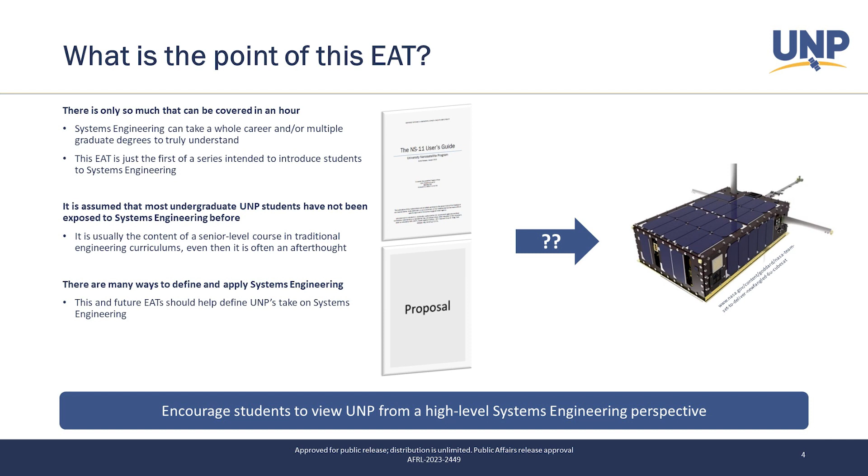There's lots of different takes on what systems engineering is, or what a systems engineer does. So I'll introduce you to a variety of those, but then it's up to you to determine exactly how it will fit into your team from the perspective of your mission and within the constraints of your university. I would say at the core of systems engineering, one of the big things is how do you go from a concept to something real? You have a proposal, you have the user's guide—now it's time to build a satellite.

Like I said on the last slide, one of those themes is realizing a successful system and getting there from an idea or concept, and how you turn that into a real system. Another theme is meeting constraints - meeting performance, cost, and schedule goals, while also meeting the needs of the customer. And the final trend is the multidisciplinary nature of it.

There's certainly a need for subject matter experts to dive deep into each individual topic, but the job of a systems engineer is to be more of a jack of all trades and to understand where you can give and take across those different areas of expertise. So it certainly is applied across pretty much all industry building products and takes into account the full life cycle of a product.

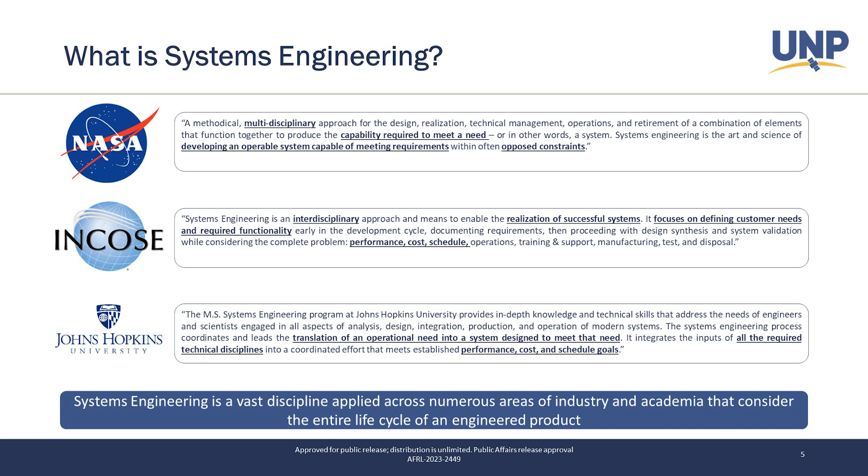It's informally been practiced forever. There are certainly large, complicated projects throughout all of ancient history, but it is more formalized now than it likely was then. Not only do we have all these parts, we have interactions, we have other things to consider. The systems engineer has to consider all of these things: electrical, mechanical, thermal, software - lots of different interfaces across lots of different systems. It's not just being a subject matter expert in one thing.

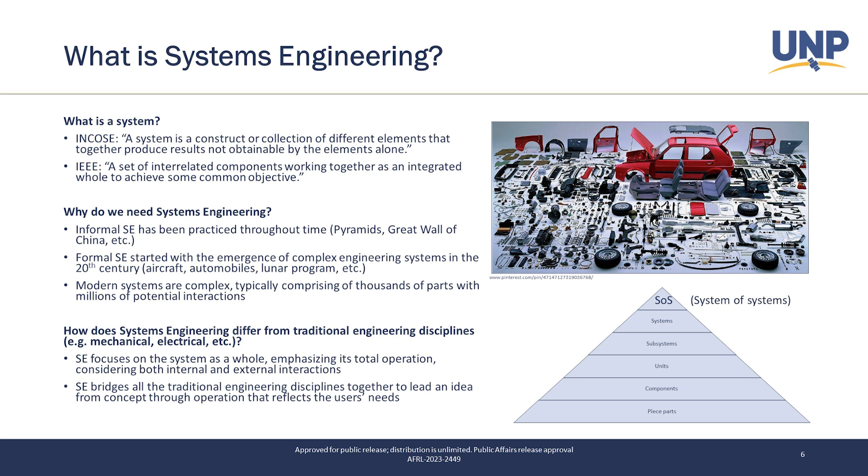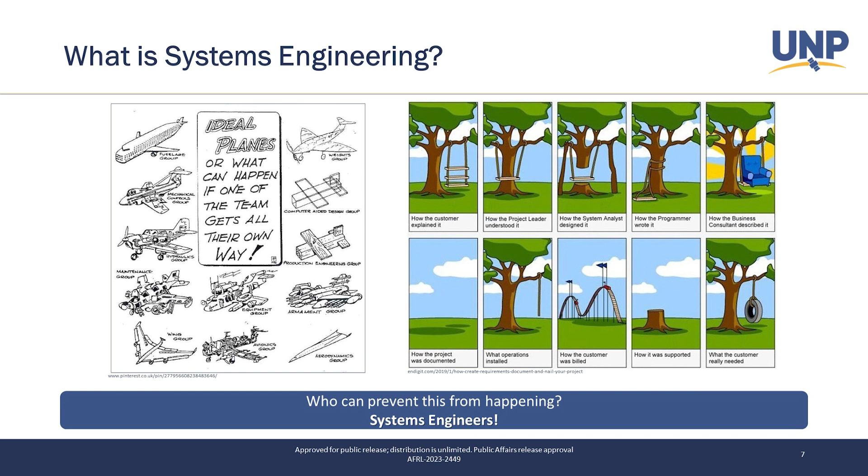There's certainly a human aspect, and that's one of the first things we'll call out here - to be an effective systems engineer, you need to understand how people work to some extent, and that people matter when you're trying to design a system. Whether it's the user interface side of people trying to use the device you created, or the personnel management side of making sure not every team creates just their ideal piece without considering what other teams need to do. The systems engineering role also frequently sits at the higher level and looks across the systems and decides where to give and take. Throughout the life cycle of a project, more information will be gathered as you develop it, but there are lots of critical decisions that have to be made early on when not all of the information exists yet.

And so that's certainly one of the key roles of a systems engineer, is understanding enough of each system to make an educated decision in the absence of complete information.

Linear systems, in terms of the system development process, are not truly linear. Ideally everything would follow the waterfall development method—do this, then this, then that. But in reality that's never the case, and you have to account for that up front. When you start designing a system, it typically won't turn out exactly how you expected, so there's going to be some iteration to adapt. Maybe your initial goals have to change, or maybe you have to redesign to meet those goals if they're not very flexible. Overall, this is going to be a cyclical process.

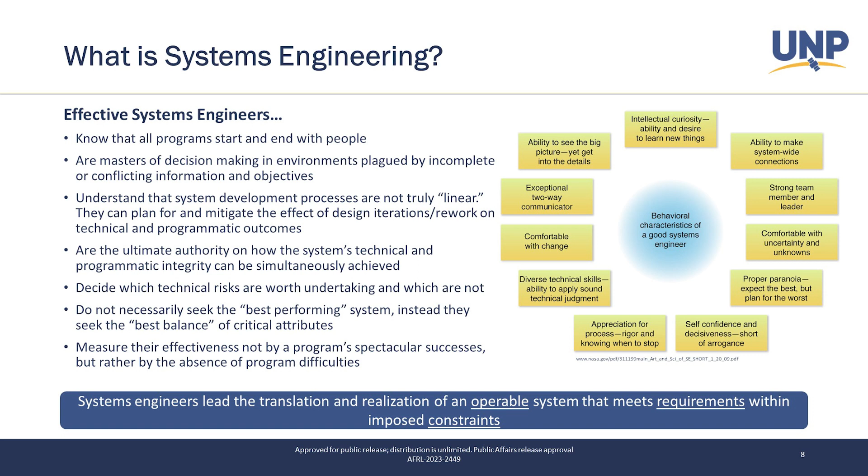And of course, it could move into ongoing maintenance and things like that. But certainly a good way to start thinking about this, and we'll visit a lot of the nuances of it in later slides.

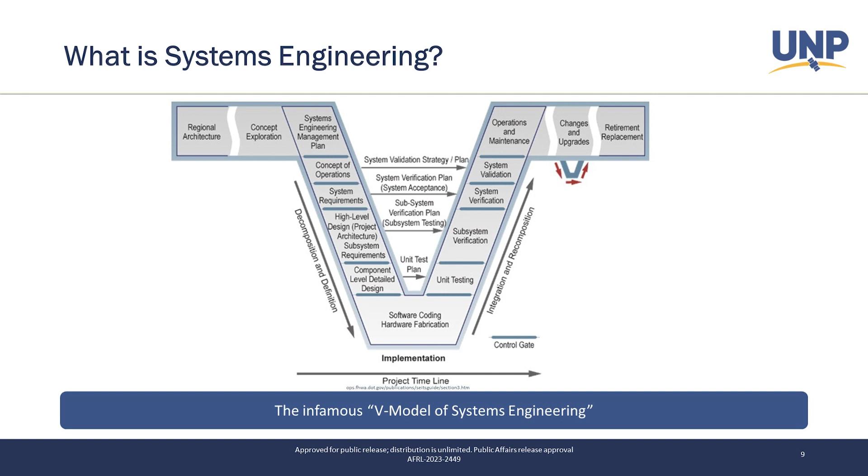One of the things we like to do as engineers in all of our courses—one of the reasons we probably got into engineering—is because we like turning bolts, writing code, and blowing up circuits we designed poorly, or something like that. We like digging into the nitty-gritty and doing the detailed design. But the problem is if we go there too soon, then the code we wrote, the CAD we designed, whatever, likely won't be correct for the overall integrated system. We have to understand the give and take of the fully integrated system before we can actually design our part to meet that.

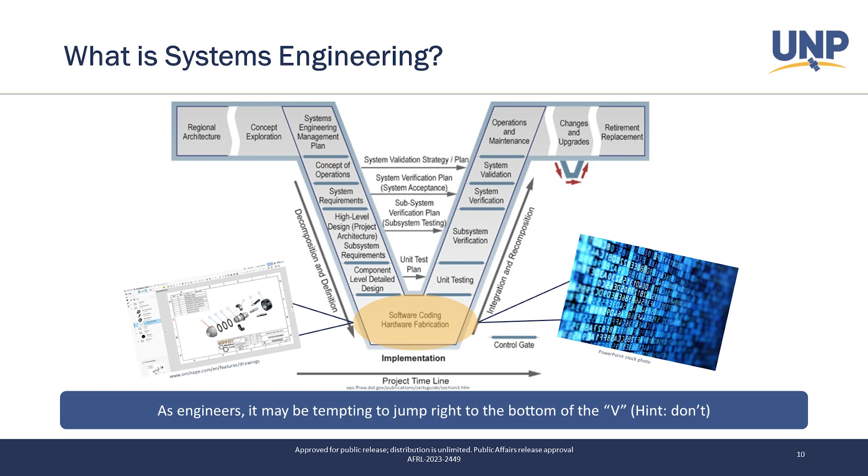So doing all this work on the left side, well, it may seem annoying at first, is actually very, very critical to realizing a fully functional system. One way to think about it is that the true design is actually occurring on that left side, before you ever even get into the detailed nuts and bolts of it.

For those of you who attended the mission design class here at kickoff the other week, we kind of went through some of this higher-level stuff already.

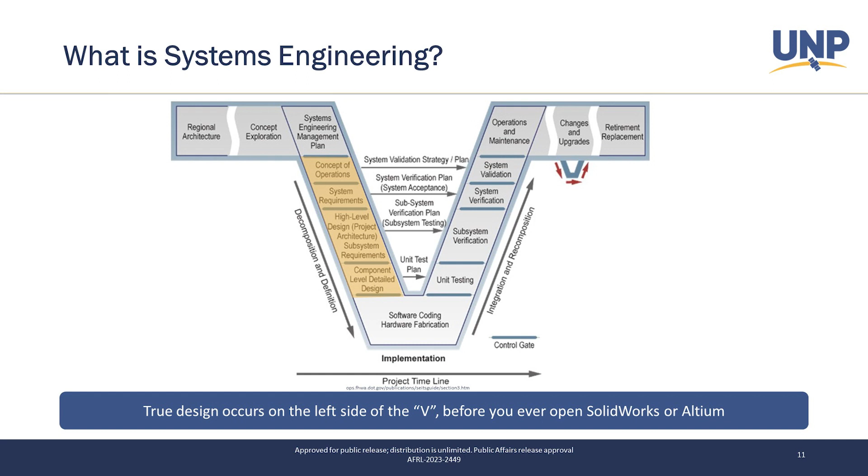And the design, there was still some actual design work done on this left side, right? We were doing some of the feasibility power budgets and data budgets, link budgets, all those early feasibility studies and analyses to say yes, this will work, before we actually just decide on something. And that's kind of what a lot of this higher upper left portion of the V is getting at.

I mentioned on the right side of the V that you're going to do all the tests to make sure everything works. And so this is an important topic in systems engineering, so it's something I want to talk about in a little bit more detail.

You may have heard the term V&V, or verification and validation. And at first glance, it might seem like those are the same thing. What's the difference there?

In terms of systems engineering, they do have different meanings, and they kind of come out of the quote at the top there - that's kind of one way to think about it, and then there's some other ways to think about it. But neither the world's greatest design poorly implemented nor a poor design brilliantly implemented is worth having.

So one of the very common definitions, the short and sweet one you'll hear, is: verification is, did you build the system right? Validation is, did you build the right system? And those aren't quite the same.

If you think about building the system right, on those bottom bullet points, well, we're going to have requirements, right, that say it has to perform at this level. Did it perform at that level?

And validation is a little bit more fuzzy, but it tends to come back to the stakeholders, right? When you hand this doohickey to a stakeholder, the person who asked for it in the first place, are they going to look at it and say, yes, this is doing exactly what I wanted it to do? Or is it not meeting what they expected out of it?

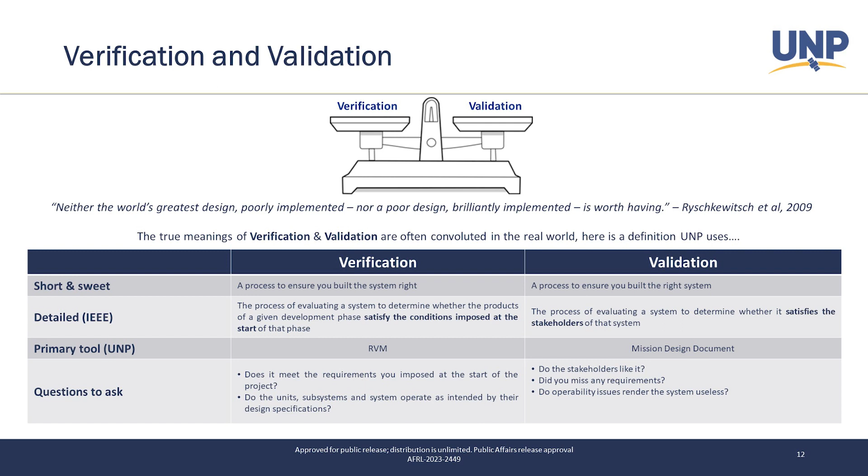A couple more things we can get into to kind of emphasize this. Well, so in all of these cases, these are all verification issues. We built the right system - we just didn't build it right.

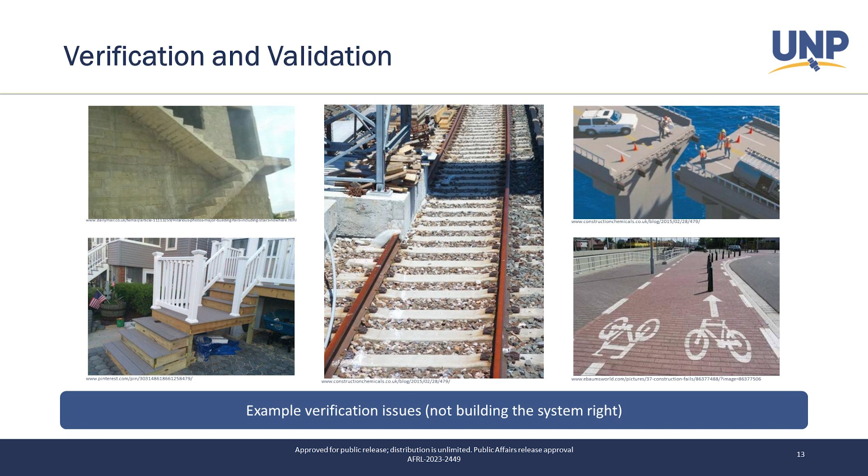So the bridge there, right - it's still a bridge, you can even see the vehicle driving on it. It's doing its job, but clearly there was a screw-up because the two halves of the bridge are not aligning. And that's kind of the case with all of these, right? They built the right system, they just didn't build the system right. And so it's not meeting requirements, it's not going to be a functional system.

A couple more examples straight out of the space world. Most of you who've been interested in space for at least a few years have probably heard about a bunch of these. NASA Genesis, for example, was sampling in orbit. It had a return capsule that was bringing the samples back to Earth. That parachute did not deploy on that return capsule, and it smashed into the ground, and most of the samples were destroyed because it smashed into the ground. The subsequent investigation found that it was most likely an accelerometer was installed backwards, which led to the wrong data, of course, and the lack of the parachute deploying.

Hubble - almost everyone is aware of Hubble's mirror that was out of focus, right? And in that case, it was actually the test apparatus itself that was wrong. And that was, of course, a huge debacle to fix.

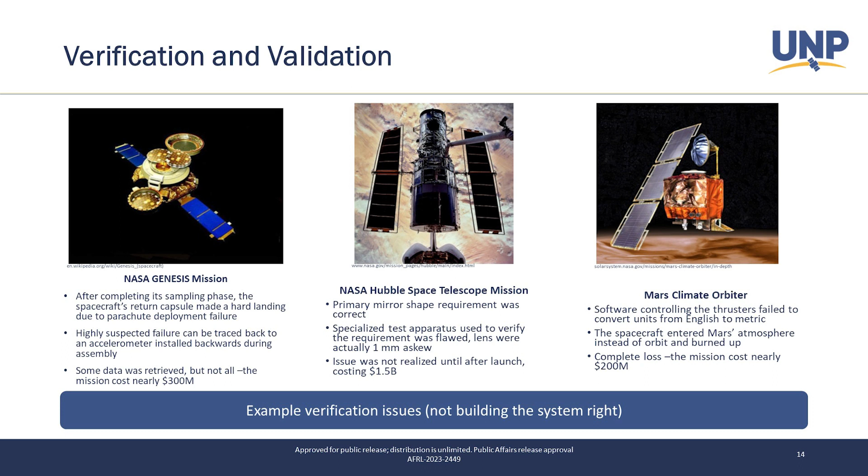And Mars Climate Orbiter - this is always the one we hear about in terms of units, right? The software had a miscommunication; it didn't take into account the units conversion between English and metric units. And because of that, it performed its reentry burn incorrectly and entered into Mars' atmosphere and burnt up. It was supposed to orbit Mars, and the burn was supposed to put it into orbit around Mars.

Now, on the other side, the validation issue - in these cases, the system was built right, the goal of the system was met, but the system itself didn't have good reason to exist.

So Juicero - this one was from a while ago, a huge startup, one of those things that kind of went viral. They made these really exquisite machines that pressed bags of juice to take advantage of the healthy diet market. This machine cost the consumer $700, and some of the articles I've read said that was likely still a loss to the company. They made this machine so complicated and expensive just to press juice bags.

Well, it turned out you could actually press the juice bags by hand, and they were trying to make the money back on that subscription for juice bags, but at the end of the day, it didn't make sense at all, and the company eventually dissolved.

Google Glass, many of you may be familiar with that as well. Hugely expensive product with basically no actual problem that it was solving. Overall, it didn't meet what stakeholders or customers were looking for, because nobody was really looking for this. So it was not a successful product in the end.

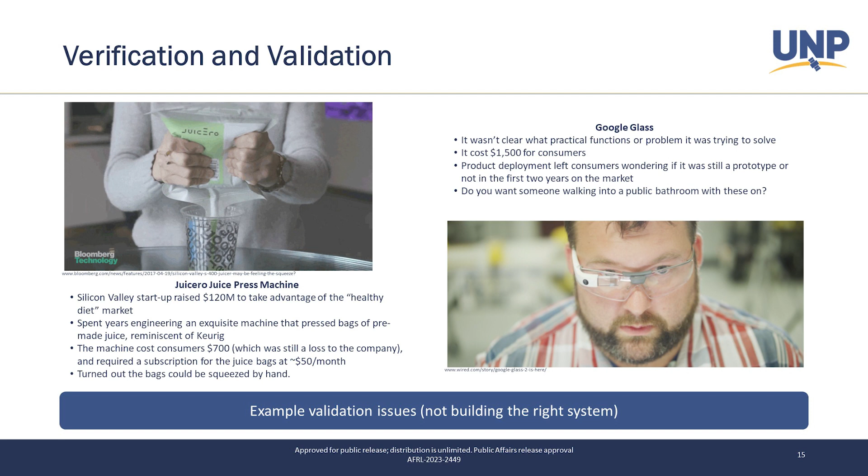So those ones both kind of make sense. This one, at first glance, may seem more like a verification issue, like it didn't meet the requirements. But in fact, this is actually a missing requirement, which falls under validation.

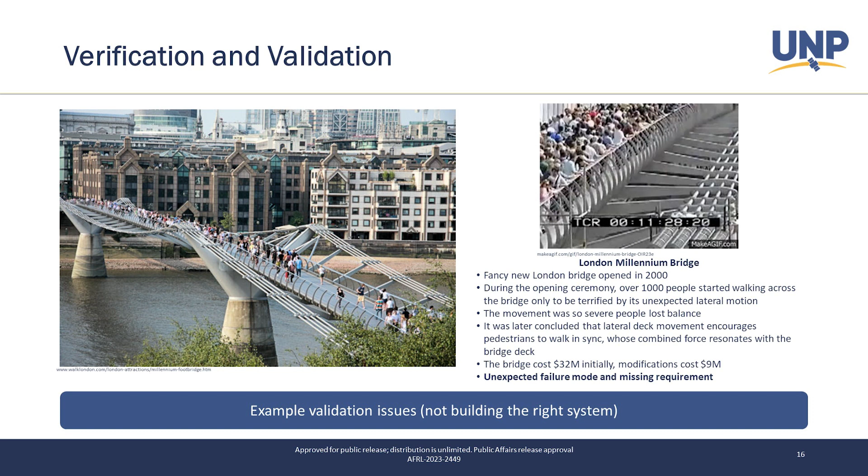This was a case of a bridge that ended up having a resonance mode that was in tune with the frequency of people walking in step. That actually exacerbated the mode, because the people walking in step made it even worse. It created this huge sway with a lot of people on it, and took a bunch of money and time to fix.

We can get back into a variety of systems engineering topics. I showed you kind of the V - that's one of the most fundamental things everyone shows for what is systems engineering. However, there's a lot of nuance to that in terms of how you actually implement it.

So a lot of large organizations will take and develop their own approach to systems engineering. This is certainly not something every organization needs to do, but in the case of NASA, being a massive organization, they have developed their own approach to how they actually do systems engineering. They call it their systems engineering engine. This can certainly be found online.

One of the keys here is NASA mostly does very large satellites, very large space vehicles, and this approach is tuned towards that. Whereas in CubeSat world, we tend to do smaller, cheaper things and accept a lot more risk. So certainly this can be good background, but if you do dig into the NASA systems engineering standards and engine, definitely keep in mind who this was written for.

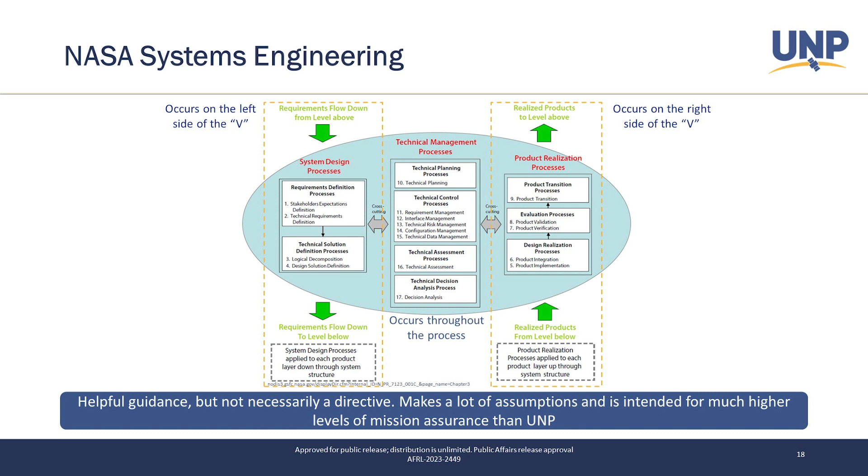And if you look at this closely, you'll see that it does align somewhat well with the V. It's not formed like a V, but on the left side, if you look at all those things, it's a lot of the same processes that go into it, where you have the flow down on the left from high level concept down to the decomposition down into designing. On the right, it goes back up the other way with the verification and validation. And in the middle, you have all of those technical management and verification, validation plans, risk management things. So overall, it is heavily V inspired, just laid out a little bit differently.

So what do we look for in UNP from a systems engineering perspective? Well, one of our major goals of UNP is systems engineering education, turning all of you into effective systems engineers to enter government, enter industry, and do this well, because good systems engineering saves money, creates effective systems. Good systems engineers are incredibly valuable to everyone. So that's our primary goal for all of you.

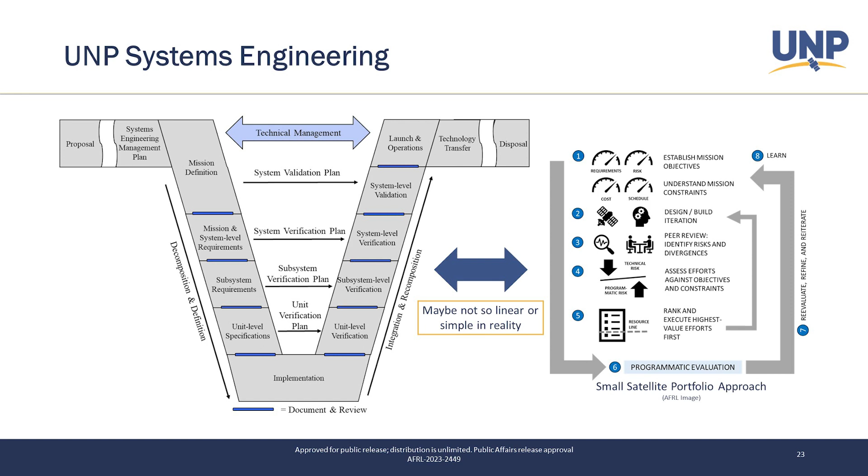This gets a little more at the go-backs. You come up with the concept and mission design, and there's going to be a lot of analysis and feasibility studies. As you get into more definition, you learn more about your system, which is probably going to cause some scope changes and constraint updates.

Of course, once you get the real hardware, you'll learn even more, and that may flow back up. By the time you're over on the right side of the V, your mission definition should be pretty well set. There may be opportunities if things go really wrong to change that.

But one of the other things you may change at that point is your ConOps—your concept of operations, how this gets used by the user. Are there changes we have to make to how we approach using it because of some limitation we found in the actual system's function?

And so that would probably be more where the right side circulation would occur, rather than going all the way back and changing your mission definition. But that could happen if there were serious issues that resulted in it, which is something we'll talk about more in future EATs, I think.

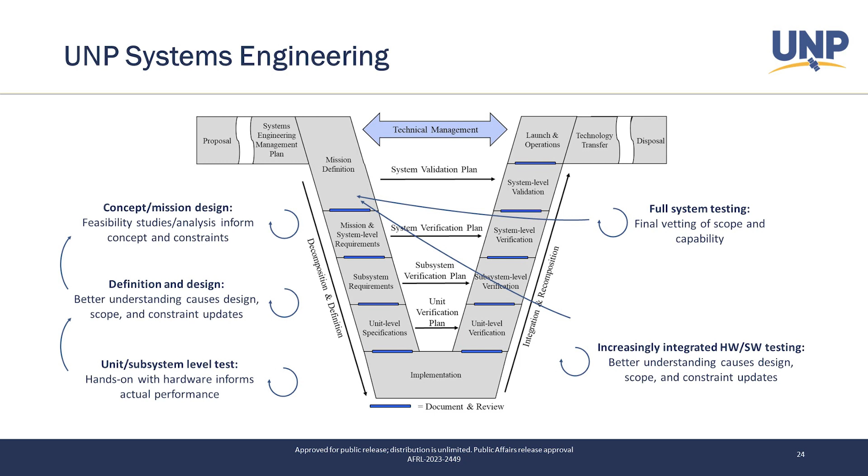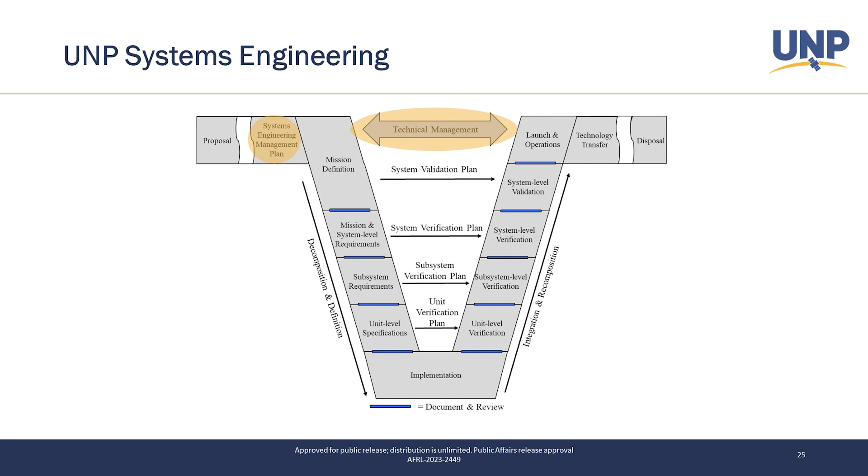One of the things you'll see up here that you may not recognize is the Systems Engineering Management Plan, some technical management things. Right now, you guys are just starting, so you're all up on this upper left side of the V. Next week we're going to have a presentation from Dr. Lauren Hunt on mission definition, so that'll cover that chunk, but we'll talk just a little bit about the SEMP today.

The Systems Engineering Management Plan is not a required deliverable to UNP, and the reason for that is this can vary greatly across teams and across your mission. What this is getting at, though, is you have to have a plan for how you're going to approach this. In some cases, that plan may not need to be super formalized or written down. If you have a really small team of people who know what they're doing, maybe that plan is more just understood. If you have a huge team, well, you probably need to formalize that and make sure everyone's on the same page with the plan.

There's a lot of questions here that can help you think about it, but at the high level: how do you keep the resources you need, personnel, scheduling, how are you scheduling things? How are you managing risk? How are you managing quality assurance and document configuration management? All those different things would be pieces of a systems engineering management plan. The bigger the organization, the more detailed this probably needs to be to ensure continuity and understanding across the lab. But this is certainly something we'd encourage you to think about and formalize to an appropriate level for your lab and your team.

I already mentioned this, the mission definition EAT will be next week. This is where you guys are kind of at in the process right now. In a month or so you're going to have your system concept reviews, which will be our chance to review where you went with mission definition. But that does not mean you should be starting mission definition at system concept review. It means you should be doing it now so that we can review and ensure you're in a good place at the system concept review.

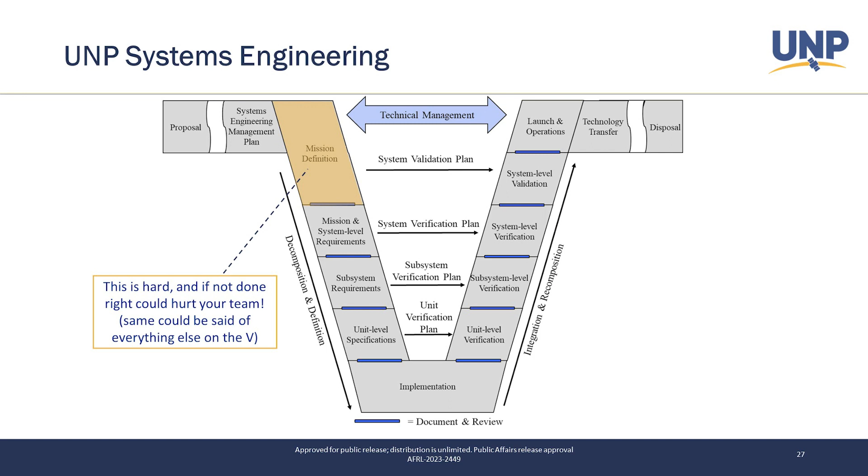One of the things I'll touch on related to this is the mission design document. This one is a UNP requirement. You will be expected to deliver this document at pretty much every review, and it will mature over time. It won't start out with the full detail. And what we've done with this is kind of included what in some cases may be three separate documents.

So the mission overview is going to be more your story to stakeholders. It's how do you explain your experiment to someone, your mission to someone who's interested and who hasn't heard about it before. The experiment plan gets more into the details of collecting your data, how your experiment's going to go, your payload, the details of your payload, more the sciencey piece. And then the ConOps is the overall, how are we going to fly this thing? What does it look like more from the user interface?

So these are all certainly things that'll be discussed in more detail, and there's a lot more detail on them in the user guide. So I definitely recommend you look there, because this is one of the first documents that UNP is going to require of you.

I've talked a little bit about flow down. This is again something that mission definition will get into, the next EAT. One of the things you frequently see in systems engineering is in order to create that, I have high level objectives, and then below that I have high level requirements, low level requirements, that there should be this clean flow down in systems engineering.

We'll talk a lot more about requirements in the second systems engineering EAT in a few weeks. But this is just kind of the hint at, you're going to have some mission statement, you're going to have some mission objectives. Eventually you need to get to the level where you can go design your detailed boards, your detailed circuits, whatever, and make sure that they meet that, as those flow back up you're going to meet your high level mission objectives, your high level mission success criteria, and ultimately your mission statement, which is more the validation piece.

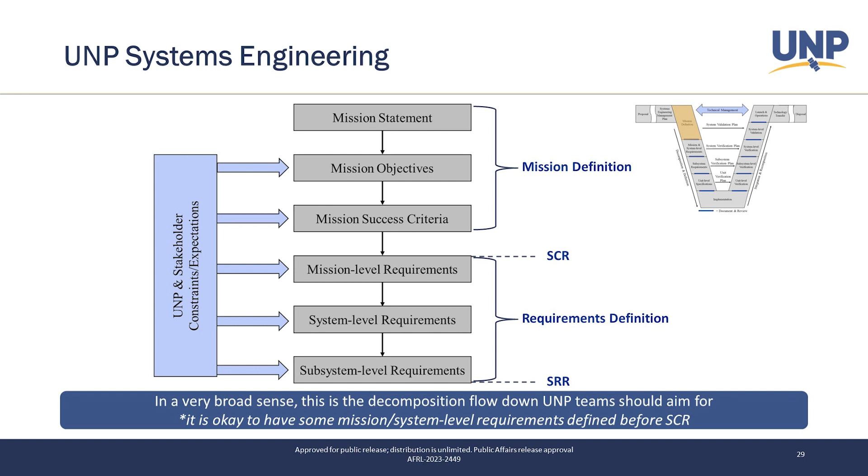UNP is going to impose various constraints on all of you. Schedule, obviously, we're holding you to. We're only giving you so much funding, and you can certainly go find funding from other sources as well, but at the end of the day there is a funding constraint on you. It's not unlimited. And the user guide has a ton of requirements that we levy on you.

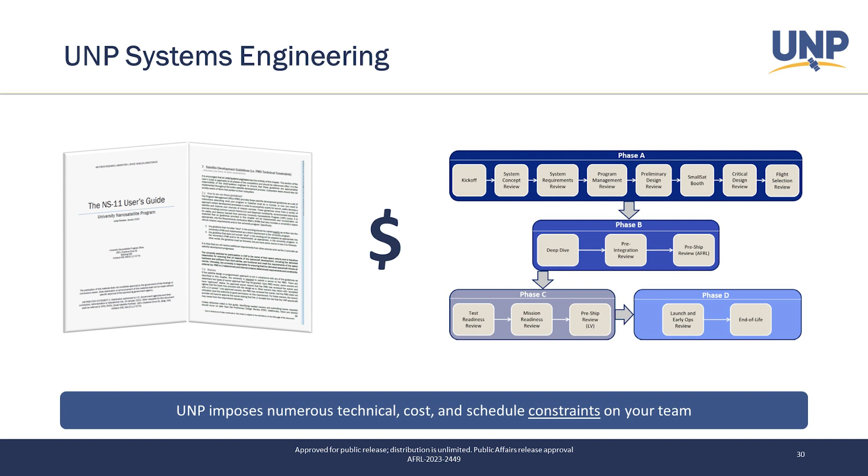Those requirements are not meant to make your life difficult. They're actually meant to make your life easier, because they all come from lessons learned over time, whether it be missions we've flown here or university missions. If you stick with those UNP requirements, it will make your life easier down the road, as you won't run into as many roadblocks from various policy or technical concerns. Some are related to launch vehicles, some are related to just making your system more functional. They're certainly not meant to make your life difficult — they're meant to help you.

A few more constraints, some of which I've already touched on. One of the big ones is just working in a university environment. You have students doing all this work, which means limited experience, limited time, and high turnover, losing a lot of your most experienced students all the time. That's always a huge one. If you have stakeholders, they may have other constraints they apply to you, and of course there's the cost, technical, and schedule constraints from UNP and our funding sources. This is also not all encompassing — there certainly can and likely will be other constraints on you as well.

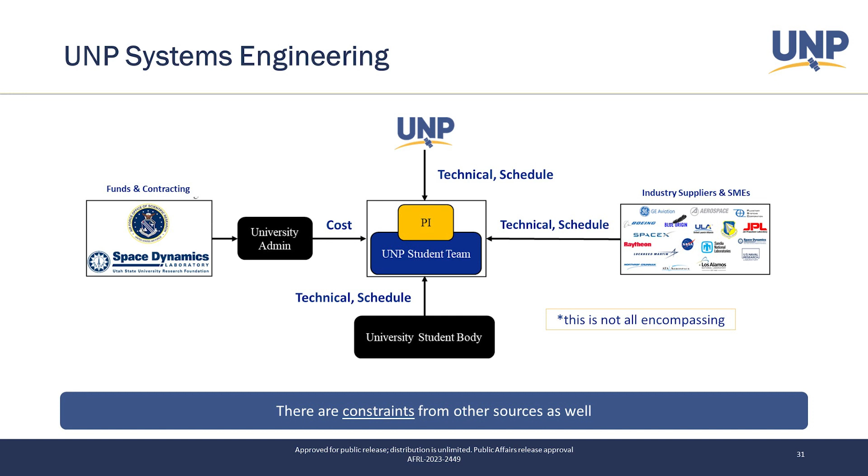Just a few more definitions as we're getting close to the end here. Stakeholder tends to be just about anyone who touches the system or is impacted by it. UNP frequently looks at stakeholders for your missions as someone who can help you determine why your system matters and why you should do it. If there is a government agency or specific personnel somewhere who has an interest in your mission and can help you understand why and how well you should do it, that can be very valuable to you. Of course, it can also be very difficult to work with those people. But when you're trying to get a satellite flown into space, you have to have some level of justification for why you should get funding and a slot to go to space, because it is not super cheap and easy to get to space. That's one thing a stakeholder can be very beneficial for.

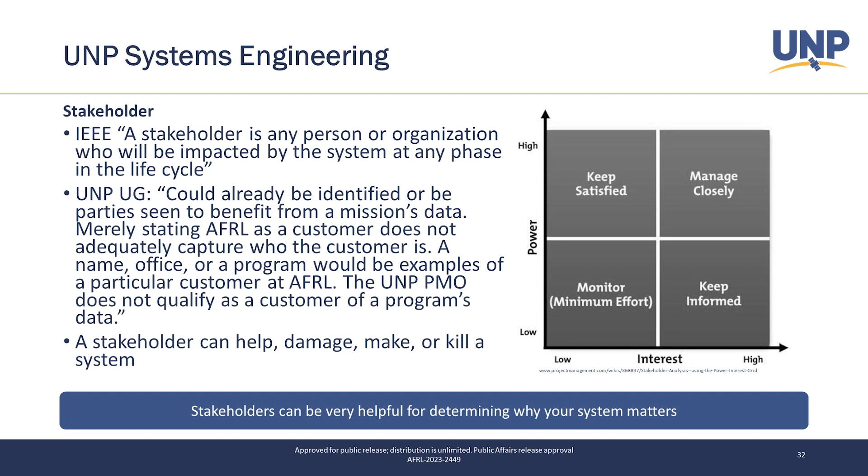But there's certainly a variety of impacts or ways you can define stakeholder. A few more things — constraints.

The user guide kind of goes into a lot of these different things. Mission objective - this is kind of what you want the system to do. You can see this comes from SMAD, that Space Mission Analysis and Design text I mentioned earlier, now called Space Mission Engineering, or the new SMAD. Success criteria are more the how well the system must do it. They should have quantitative values in them versus the objective, which is probably more qualitative.

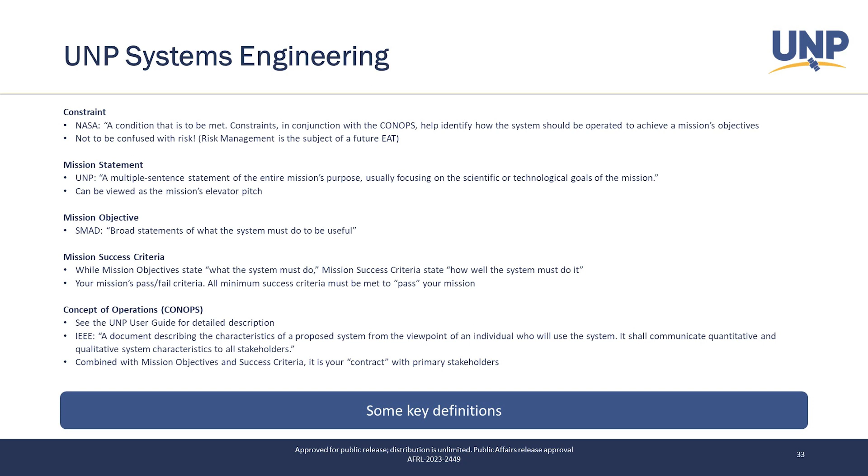And then the ConOps, concept of operations. This can be a complicated one. I would certainly encourage you to go look at the user guide for it. But at the high level, it's kind of like the characteristics and how you interact with a system from the perspective of the individual who will use it. Certainly go dive more into the user guide for this, and this will be touched on more next week at the Mission Design EAT as well. Just a quick taste of what you're going to see next week.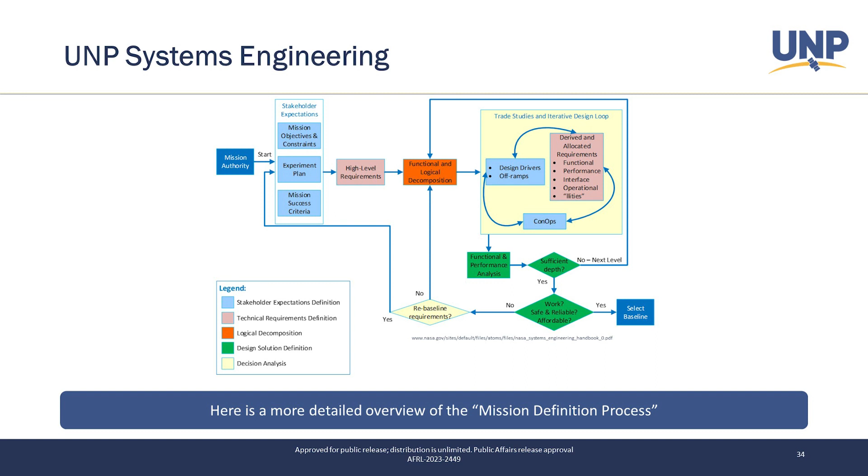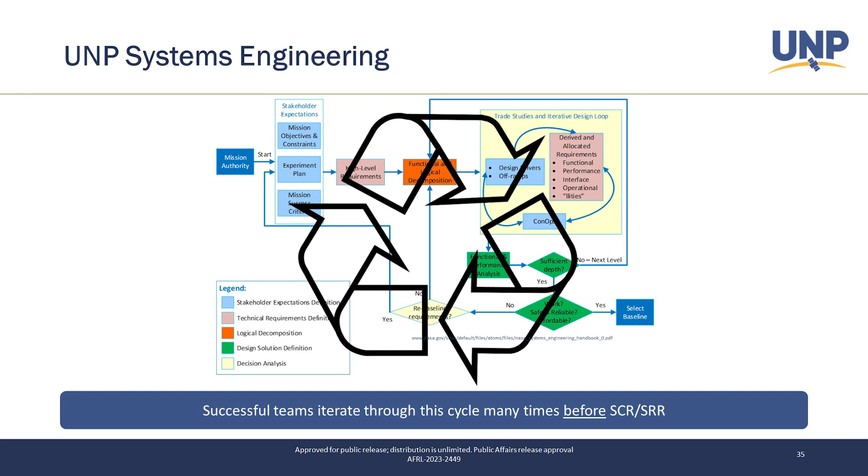So this is certainly something I'd encourage you to go start looking at right now, because this is something you should have made at least a few iterations on before your system concept review. And just to kind of foot stomp, this is something that you definitely need to start doing now if you haven't already, because it's never one and done. This takes iteration to get to the right answer.

Just one more little broad idea of what this is going to look like. So next week is going to be the mission definition EAT. There will be a systems engineering part 2 EAT that'll start to dive much more into requirements and how we define those. Systems engineering 3 will look a bit more at the philosophical side of validation, verification, planning, managing stuff. And then we have a lot of other EATs. Most of them will be more on the bottom of the V, the kind of details of subsystems and things like that.

But a few of them will climb up the right side and get into verification, validation, even a bit into operations. And even though you certainly won't be anywhere near doing those things yet, especially the operations, there are things you can do now as you design the system that will make your life a lot easier when it comes time to do those operations and things. And so that's what we're trying to help you with in these EATs, is helping you understand the knobs you can turn now to not have people in the future be mad at you for the choices you made.

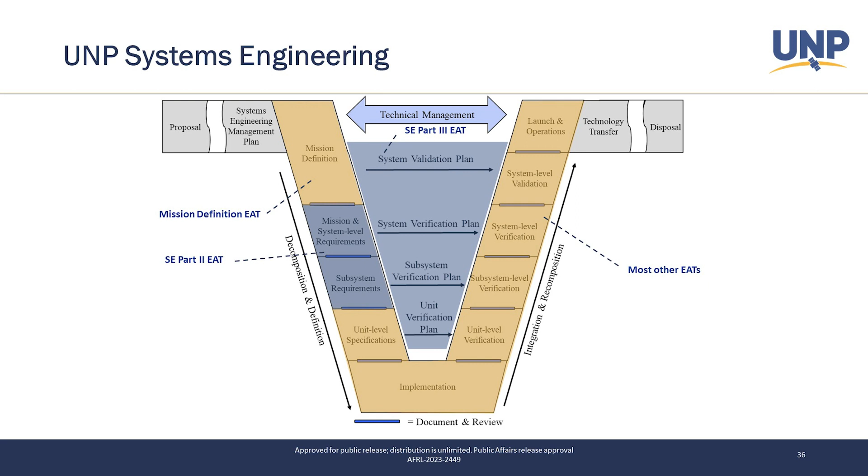So, like I said, this was just a brief intro to systems engineering. It's a massive, massive topic. The user guide has more info. Certainly you can ask questions, either now or by reaching out to us via email. Like I said, there's the list of resources, but that's what I have for you today. So I will take questions.

I had a quick question regarding - I believe this is part of the systems engineering management plan, or project management plan. I was taking notes during the thing, and one of the questions we were told to think about is, how do we train new members and how do we keep team members accountable for the projects that we're working on? So I was just wondering, what would be an approach to that? Because at the university level, we can't really afford to give people salaries, and the only real incentive we have is students being internally motivated to do their stuff.

But that's not necessarily something we can expect from everyone. So I'm just wondering. Yeah, that certainly can be challenging. It varies by university. Some universities, there may be paid positions. Some universities, there may not be paid, but there may be some credits associated with the course or something that's actually allows you to hold them accountable to a standard or to an expectation.

If you don't have any of those, then it certainly can get more challenging. I think one of the biggest pieces in that case is to make sure you develop a culture of accountability, and ensure that culture leads people to meet their requirements, and isn't passive about it not mattering if they didn't do what they said they would do. So I would say that's probably one of the important ways.